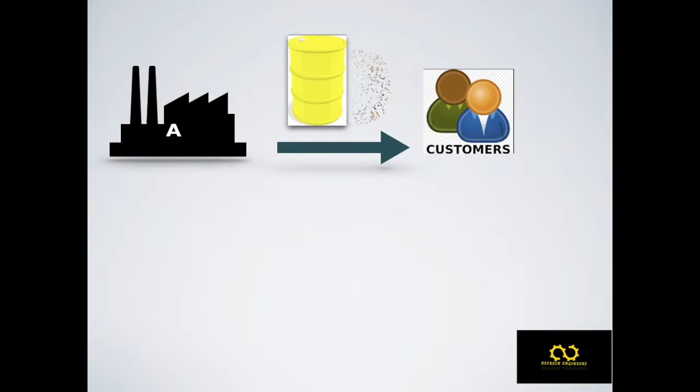Company A wants to meet demand of 1000 tons per year of chemicals to supply customers. But Company A is unable to meet 100% of the demand and is able to supply only 700 tons per year.

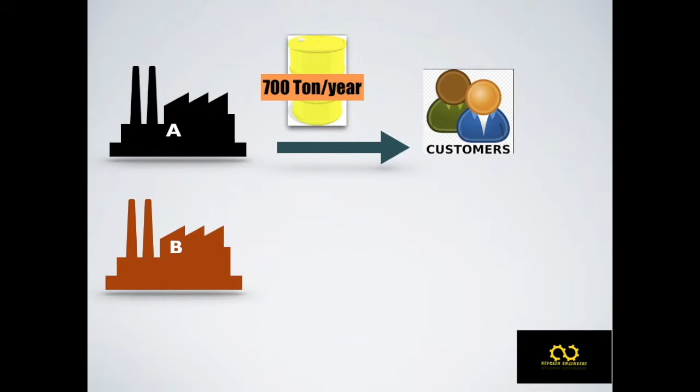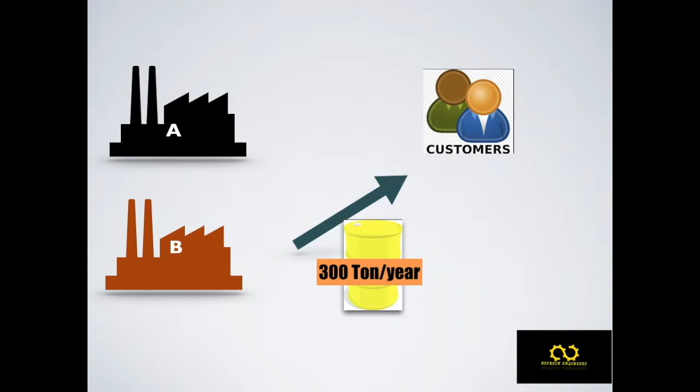Then the customer decided to source another company, called Company B, to supply the shortage quantity of the balance 300 tons per year. Then from the next year, the customer decided to allocate 100% business to Company B, meaning no business to Company A.

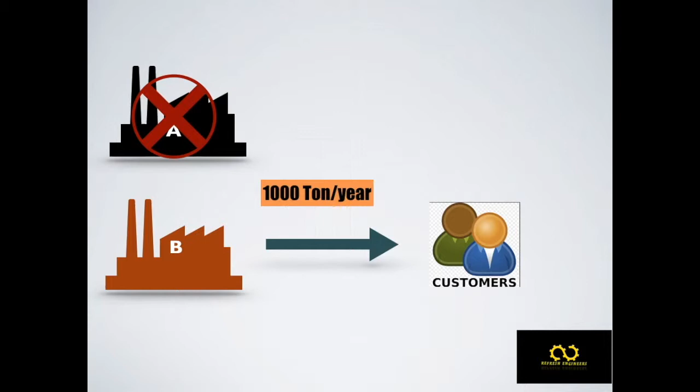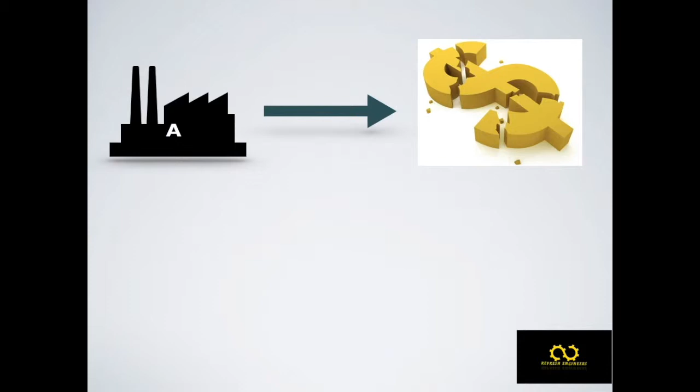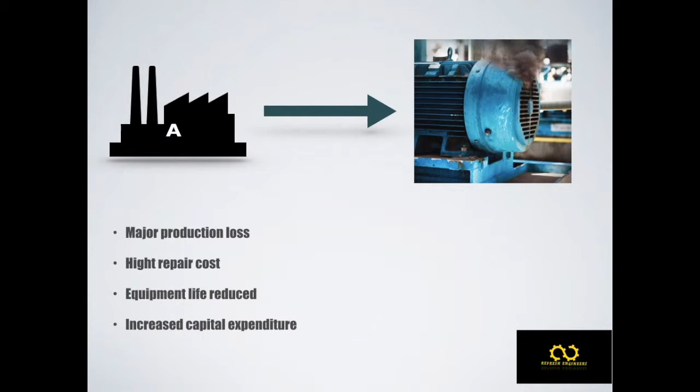So Company A suffered a huge money loss due to this problem. The reason is Company A faced too many failures of critical equipment, which caused major production loss, high repair cost, reduced equipment life, and increased capital expenditure.

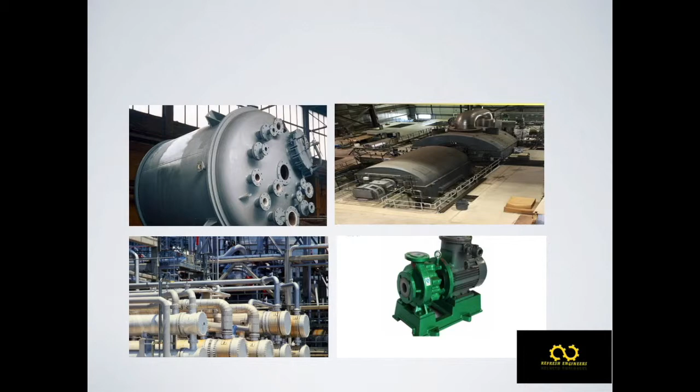Both companies have the same type of process equipment, but Company B maintained the best preventive maintenance practice to meet the required demand, whereas Company A lacked preventive maintenance. This created a huge loss, making Company A unable to meet the customer's demand.

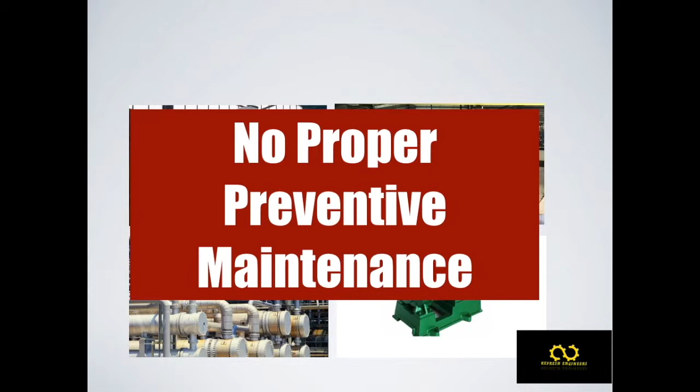So the maintenance reliability engineers came into the role to fix this concern, to adopt the best preventive maintenance practice to recover the company from huge loss. How can the maintenance engineer recover the company's loss by adopting the best practices of preventive maintenance?

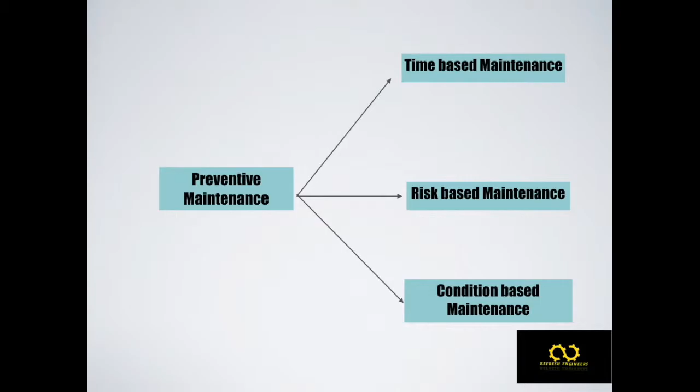Time-based maintenance. You may have the clarification, why time-based maintenance? All preventive maintenance is time-based maintenance, scheduled maintenance. If it is not time-based maintenance, then it is called emergency maintenance. According to the time-based maintenance concept, it treats failure only for aging components.

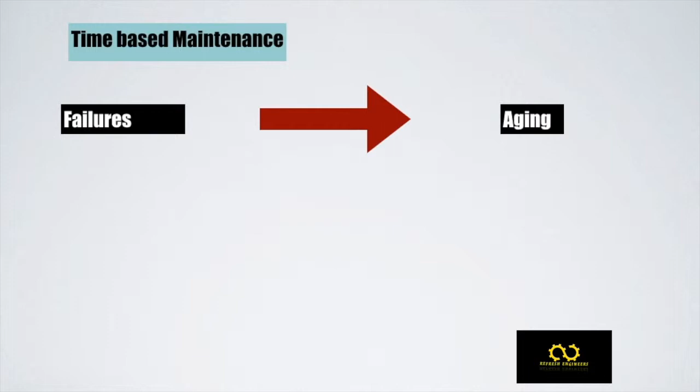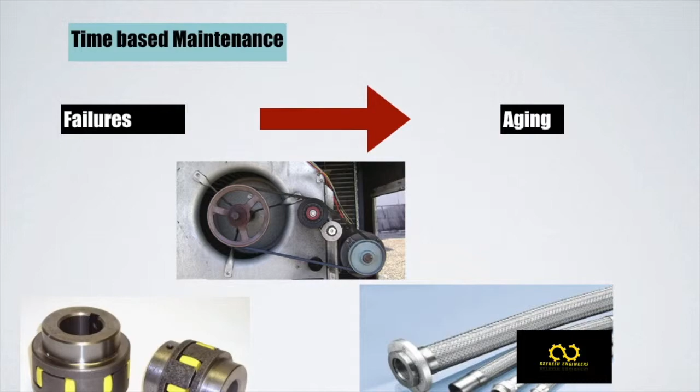Simply, small or accessible parts like belts, hoses, and couplings, which never require opening or dismantling the equipment, these parts can be replaced at a defined interval of time.

If an equipment's behavior is going worse, even if we follow time-based maintenance, immediately the maintenance engineer conducts a risk assessment on the failing equipment. Then he develops a risk-based maintenance schedule. Yes, maybe he will increase the frequency of time-based inspection or maintenance to improve the reliability and performance of the equipment.

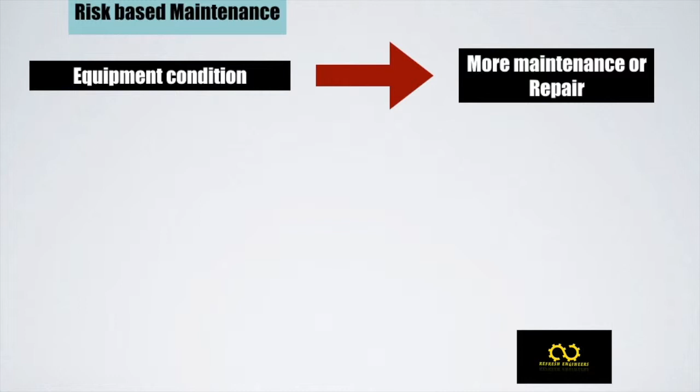In risk-based maintenance, if an equipment's behavior permits more maintenance or repair, risk-based maintenance shall be implemented, and it follows the methodology of risk assessment. The maintenance engineer starts doing the risk assessment on the failure equipment.

This is applicable for most static equipment, like column vessels and exchangers. This is called risk-based inspection, RBI in short. Maintenance engineers can perform the risk-based inspection and recommend what should be done on an interval basis. So this is applicable for static equipment as well as safety critical equipment.

So the outside simple parts like hoses, pipelines, couplings, or belt drives, we can easily do the maintenance. We can easily change the parts. We can check physically, by our own vision, what the condition of the parts is.

Many parts are running inside the equipment. How can we evaluate, how can we identify the condition? The only method is condition monitoring. Yes, the physical evidence of the behavior of the internal parts of the equipment is ensured and monitored by condition-based maintenance.

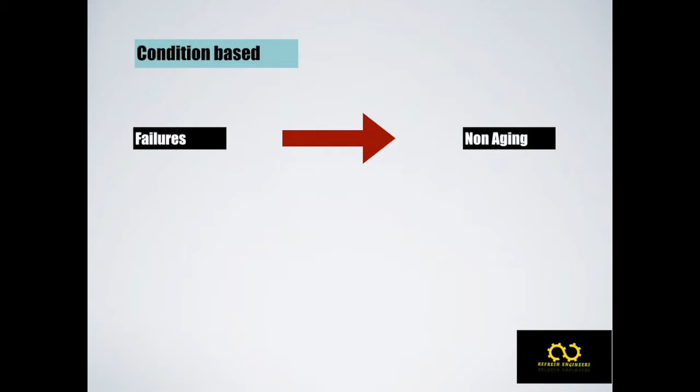Mostly, this condition-based maintenance can be applicable for rotating equipment. And the main concept followed in condition-based maintenance is the PF curve. It's a graph to compare the equipment's condition, or behavior, versus time.

So the earliest possible prediction of equipment failure can be detected by using a vibration sensor, temperature sensors, or artificial intelligence. We collect the data using machine learning, and we can predict the earliest failure of any equipment with evidence. This is the modern technology of condition-based maintenance.

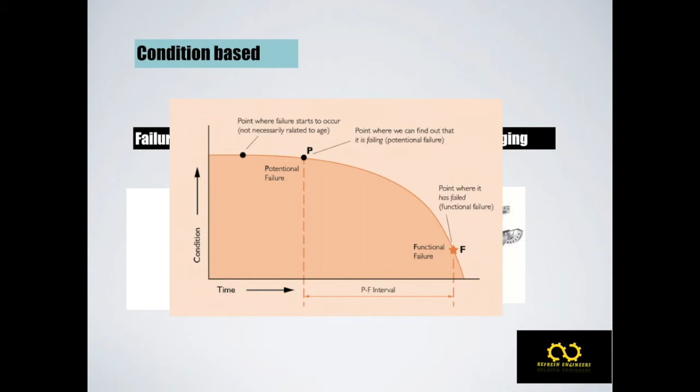So preventive maintenance is a must.